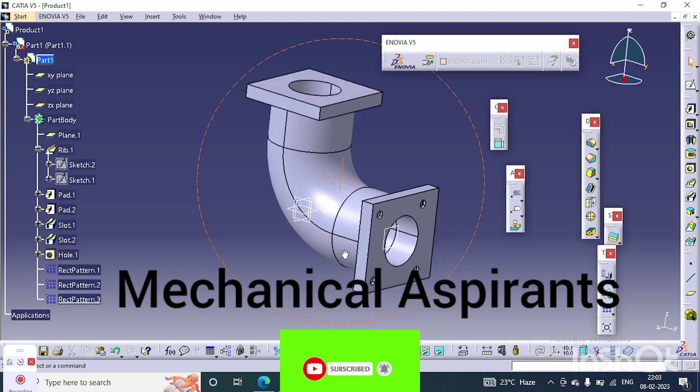Of elbow using CATIA V5 software. So before proceeding towards our drawing, we will first look towards the 2D view of our drawing.

You can see it is having a flange of thickness 50 mm, and it is also having a diameter of 290 mm and inner diameter of 210 mm. We can also see the elbow curvature of radius 260 mm. So this is the detailed 2D view of the drawing.

We can also see the 3D part which we have to draw in CATIA V5. So I will proceed towards our 3D view. We have to go into Start, Mechanical Design, Part Design.

You can see all the tools are messed up, so I will insert it systematically and go into customize. Then we have to go into toolbars, then click on restore all contents, restore all positions. Now you can see all the tools are arranged in a systematic manner.

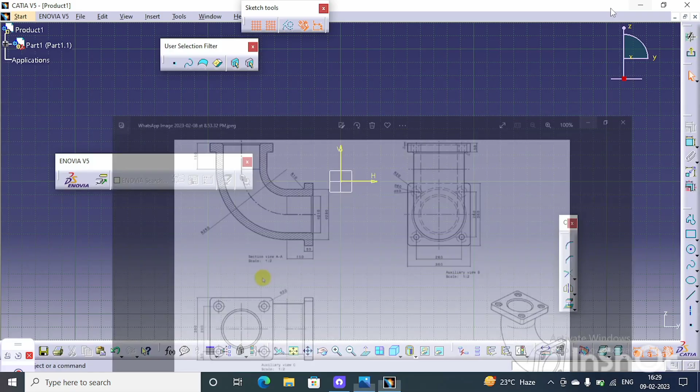So I will select any one plane. As you can see in this drawing, I will clarify that I am not going to focus that much on the dimensions, because I am going to just teach about the method of how to draw an elbow joint, so that once you know the method, you can draw an elbow joint with any dimensions. It's just all about the method, you just need to concentrate on the method. Once you know the method, you can automatically draw an elbow joint of any dimension.

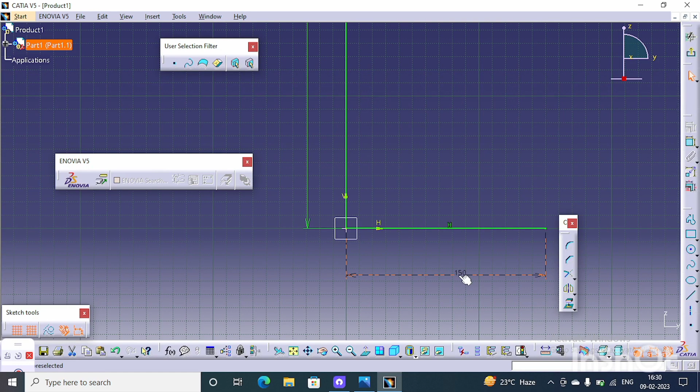I will give the dimensions, for example 400 mm, and I will give this lower part a dimension of 400 mm each. So I will just rearrange our drawing.

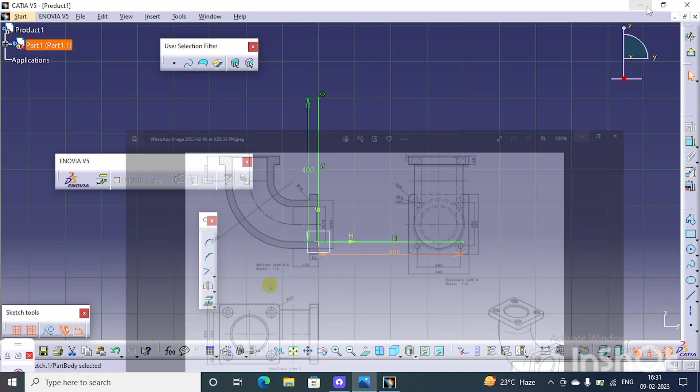Pressing zoom out, you can see we have to make a curvature of radius 260 mm. So we can use a fillet option, which is also known as a corner option in CATIA V5. We have to not be confused between CATIA and AutoCAD.

The function is the same, just the names are different.

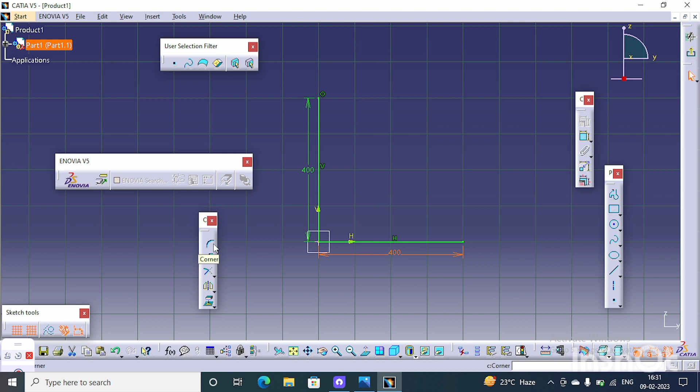I have given the dimension of 260 mm, so we have to also give this upper part dimensions, so that we can easily fit the flange on it. So I will give this dimension.

You can see this is converted into purple color, meaning it cannot be extruded or padded. So we have to eliminate it, meaning it's over constrained. To eliminate this over constraint, we have to eliminate one dimension.

So I will give it as 150 mm. I will eliminate this dimension too, to avoid over constraint. So I will click on 150 and give the dimension as 150 mm. We'll just arrange the tool systematically.

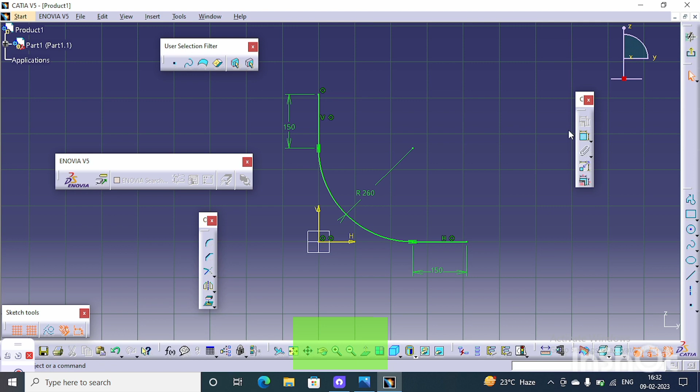I will press the exit option. Now we have to select a plane. The purpose of the plane is so that we can draw a circle, and then further we can proceed for an elbow option.

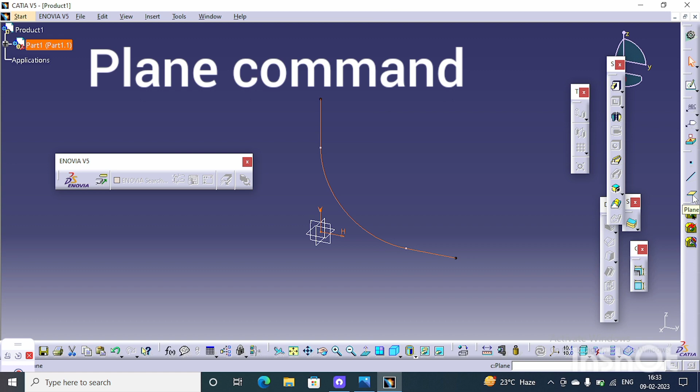I'm just trying to find the plane option. Here we can see there is a plane command, so you have to just click on this plane command. You can see it has already selected the curvature, so we have to draw on this part. We have to click on this plane and press OK.

Now we have to sketch on this plane. We have to click on that plane and just click on the sketch option. I will rearrange the drawing.

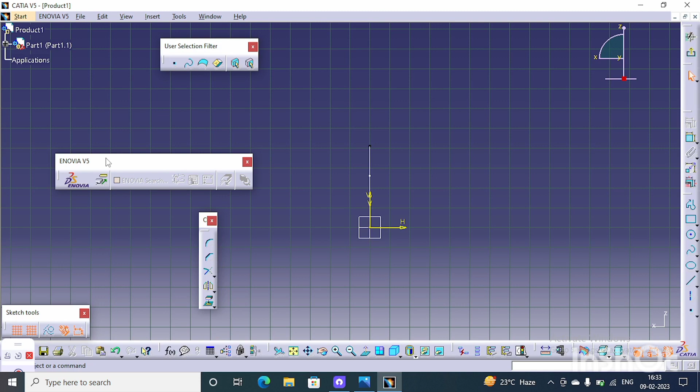I will draw a circle of, here we can see there is a circle of 290 mm, so I will take the circle as 300 mm.

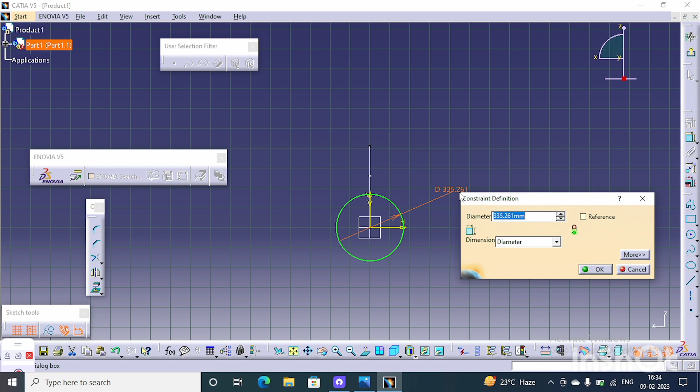At the start of the video I already told you that I am not going to focus on the dimensions. I am just teaching the method of how we can draw the elbow joint, so that you can draw the elbow joint of any dimensions.

So I will press the escape option. Here we have to use the rib command. The function of the rib command is to trace the center line of that circle.

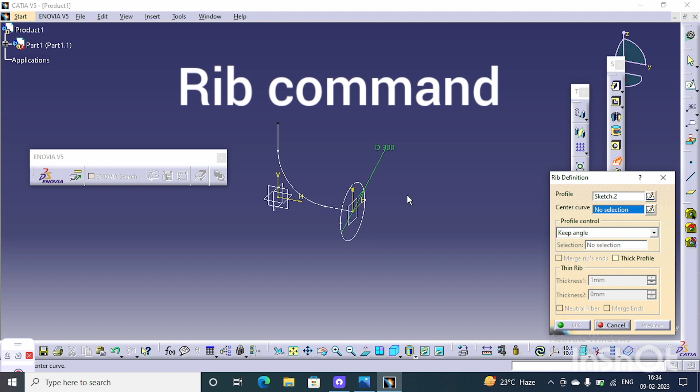So here it's asking for a center curve. I will just select on it and show you the preview. This is the preview of our elbow joint. I will just press OK. So you can see we have successfully

converted into a 3D elbow part. Now the only part that is left is the upper flange. We have to draw the flange on both sides. One more thing we can see is that this elbow is a hollow part. So simultaneously when we draw a flange, we will make a through hole through the elbow joint.

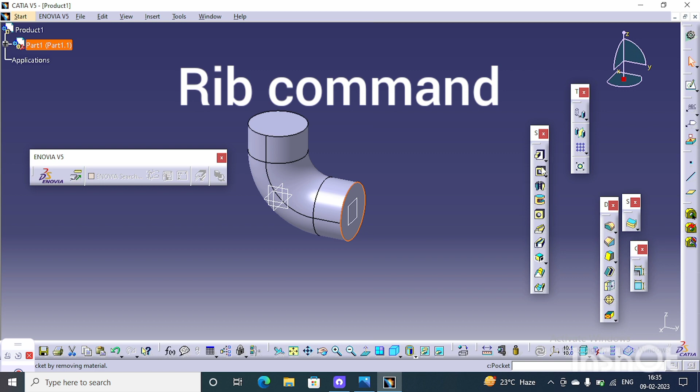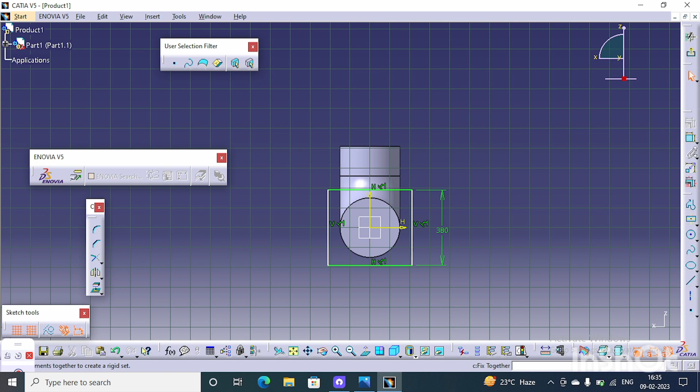We'll just press on the sketch. Then I will take a centered rectangle, press here, and I will just give the dimension. I have given the dimension as 380 mm. I will escape, then use a pad command. Now we can see the thickness of 50 mm of the flange here.

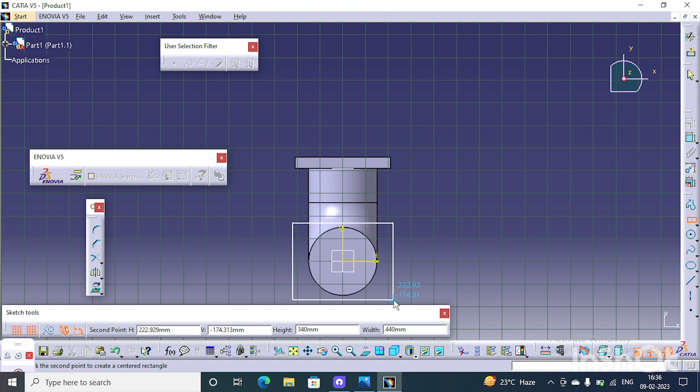So 50 mm I have given. Here again we have to draw a flange, a centered rectangle. Then we have to give it as 380 mm. I will just press exit option. I will use pad command, give 50 mm. So by default it has selected.

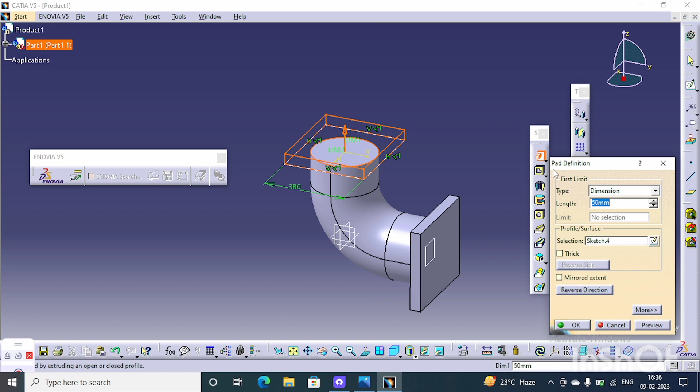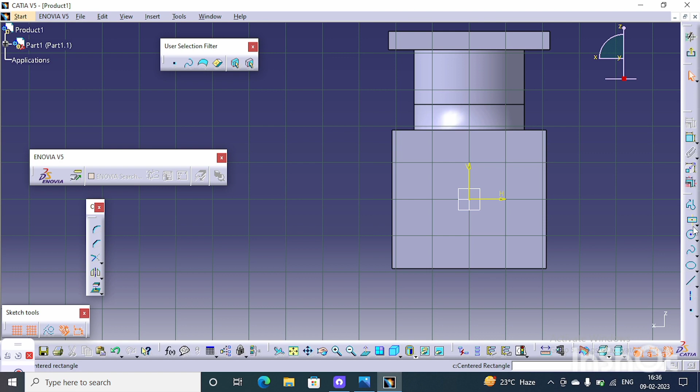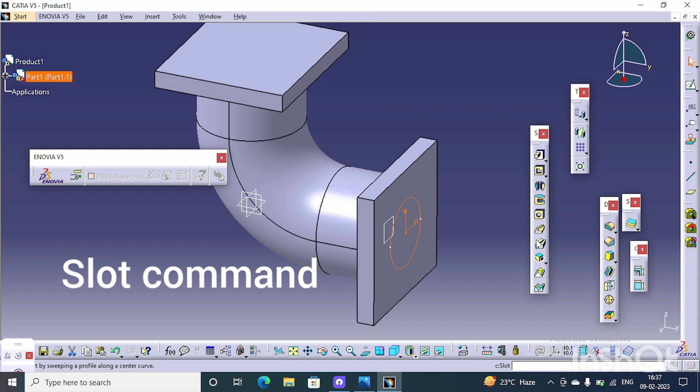Okay, so now we have to create a through hole through this elbow joint. So now I will draw a circle. We'll just go back to the sketch command. We have seen the circle of 210 mm. I will draw a circle of 200 mm. Now I will press exit option, and now we have to use a slot command. The purpose of this slot command is to make a through hole through the center axis of this elbow.

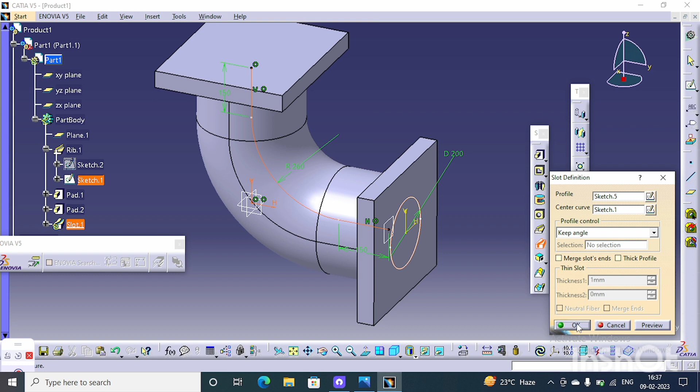Now it's asking for the selection. Now you can see the color has been changed. I will bring back to that color. Now I will just select sketch 1, just press OK. Then now you can see we have successfully created a through hole through this elbow joint.

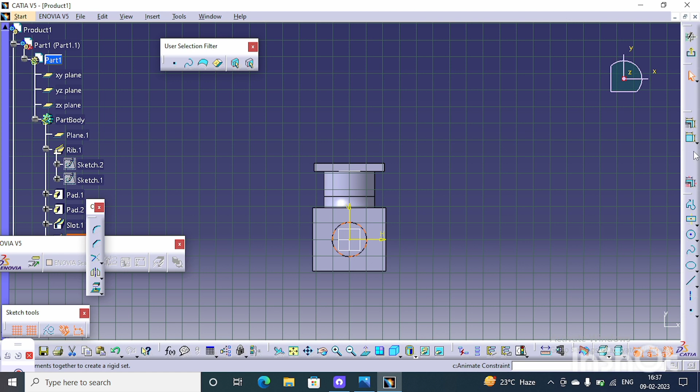Now we have to create a through hole on the upper side of this elbow joint. We'll just get back to the drawing. Now I will press circle command. I will give the dimension of 200 mm. I will just press exit option. Now I will select a slot command. Will press the sketch 1 and press OK. Now you can see I have created a through hole on both sides of the elbow.

The only part that is left is the 4 holes. The purpose of these holes is to provide fitting with the coupling using the nut and bolt assembly. So I will just demonstrate about that hole command.

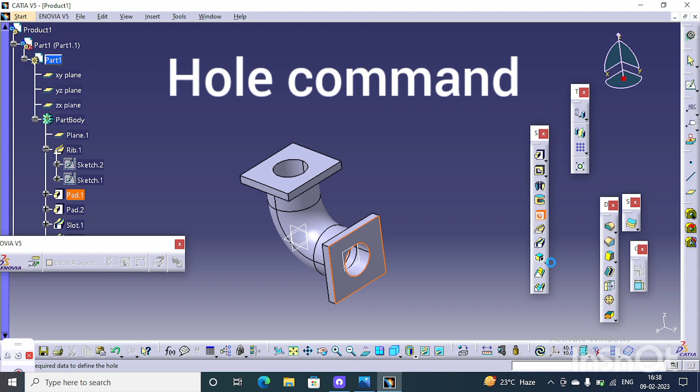So here we have to directly select the hole. I will press on this part. So you can see it's asking for a hole. I will not take a simple hole, I will take a counter bored hole. So I will give a diameter of 40 mm, a depth of 10 mm. Just press OK option. Now you can see I have created one hole.

Now similarly I have to create 4 holes. So instead of selecting the hole option, we can directly create 4 holes. Firstly we have to press Ctrl and then press on this hole. Then you can see the red mark, that means the hole has been selected. Now we have to click on rectangular pattern command. Now it's asking for the spacing, so I will randomly give the spacing of 150 mm.

So it's asking for the reference element here. I will give the reference as the upper part. Okay, I will just increase this one. So I will just press OK. Now you can see I have created 2 holes.

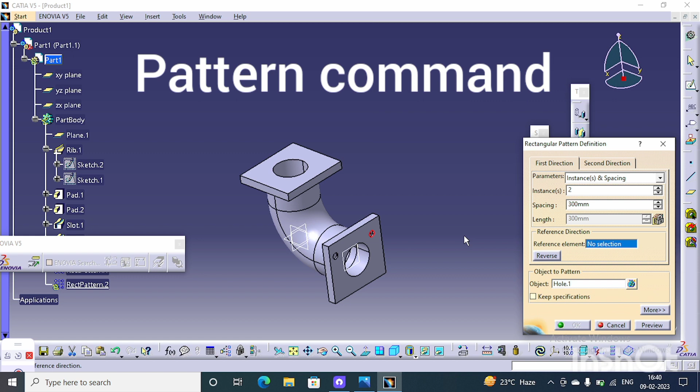Now similarly I will press Ctrl and select this hole, and again click rectangular pattern definition command. It's asking for the reference. I will give this as a reference. We can see it's giving the hole on the upper side where we have not required, so I will just press the reverse option. I will just reduce the spacing. So I will give the spacing of 250 mm, and I will just press the OK option.

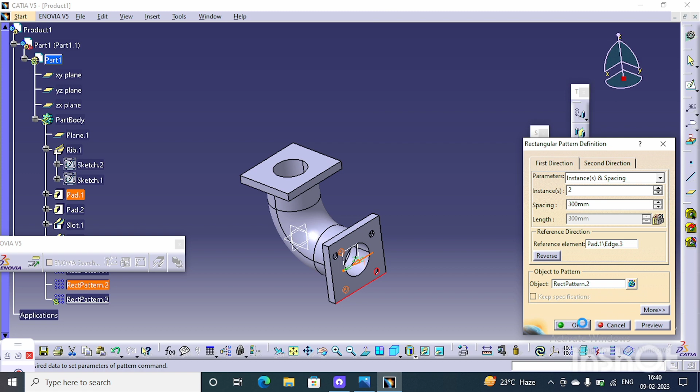So now I will similarly select this one hole and rectangular pattern command. Then I will give the spacing of 250 mm. So it's asking for a reference point. I will give this as a reference point. So I will reverse that direction. I will just increase the spacing. Press OK. So you can see I have successfully created the 4 holes.

So similarly you can create 4 holes on these upper flange. Try it and tell me in the comment section.